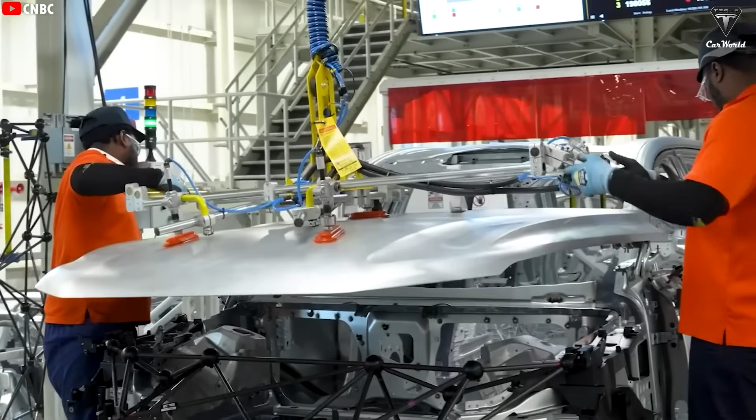But why are EVs so expensive? Why do so many people still push back against them? Well, the answer's pretty obvious. The battery. Batteries can make up nearly 40% of the total cost of an EV. And right now, most of those batteries are lithium-based. In fact, about 75% of the EVs on the road today run on lithium batteries.

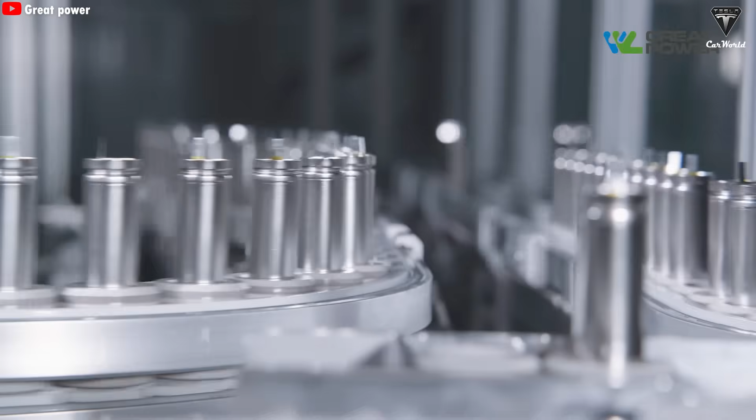Here's the undeniable truth. For years, the world has been living under the reign of lithium-ion. It's everywhere, not just in EVs, but in your iPhone, your AC remote, your kids' toys. You name it, it's lithium-powered. But believe it or not, that's about to change. In the not-so-distant future, lithium might be completely replaced, at least in EVs.

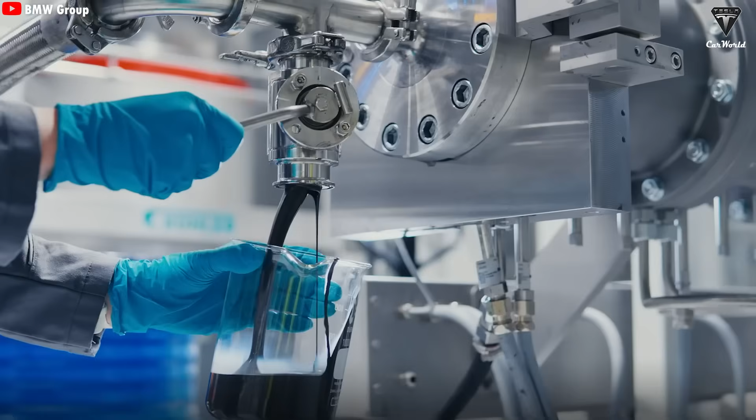Why? Because there are tons of new battery technologies being developed around the globe, all with one mission: to kick lithium off the throne. And if you hate Tesla, you might want to brace yourself, because this next part is only going to make you hate them more. Once again, Tesla is about to drop a battery that could change the game. We're talking about something with up to 3 times the energy density of what they're using now.

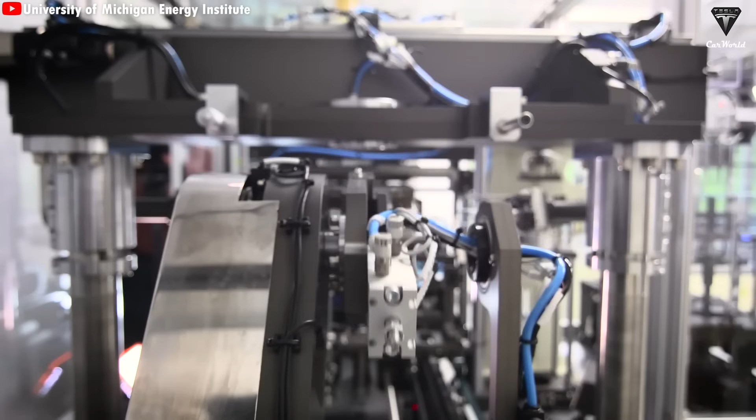Almost nobody knows what just happened at Tesla, but this new battery could completely rewrite the company's future, and it might just be Elon Musk's biggest gamble yet. How powerful is it? How cheap could it get? Let's find out. These new batteries have clearly been in the works at Tesla for a long time.

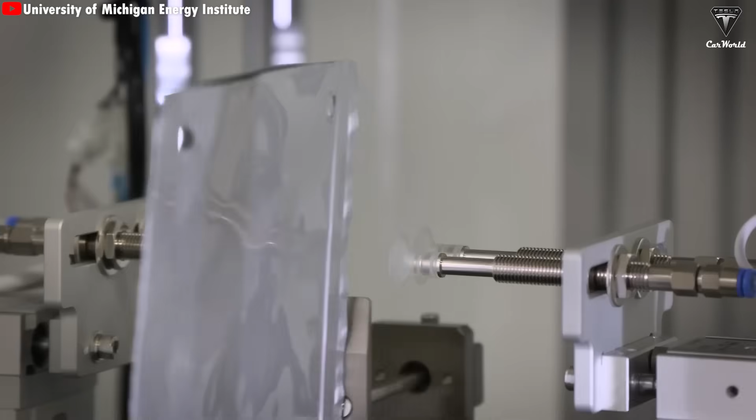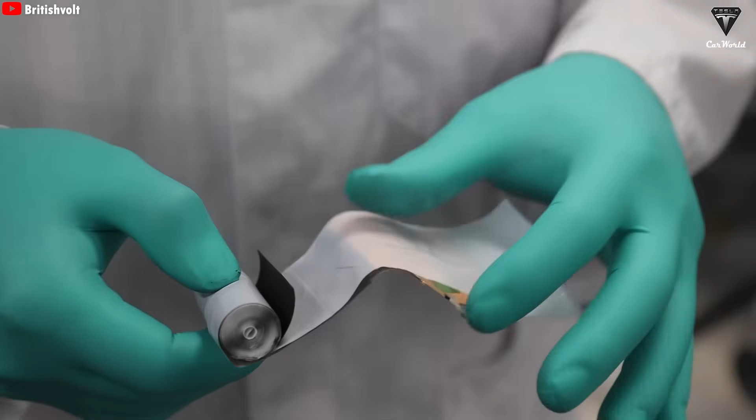Even though the company has tried to keep it under wraps, internal leaks have made it obvious that Tesla wants people to know they're doing something big to push EV battery technology forward, especially for the affordable model set to launch in the near future. What's mind-blowing is that this new battery is made from materials that are far more common and much cheaper than lithium, yet it delivers 3 times the energy density of current lithium-ion batteries.

Of course, no technology is perfect from day one. There are still a few hurdles to overcome. But overall, this battery is already superior in nearly every way. And once those final challenges are solved, this won't just compete with lithium. It could replace it entirely, ending lithium's reign once and for all. Yeah, this is the Tesla A1 battery, the company's first-generation aluminum-ion battery.

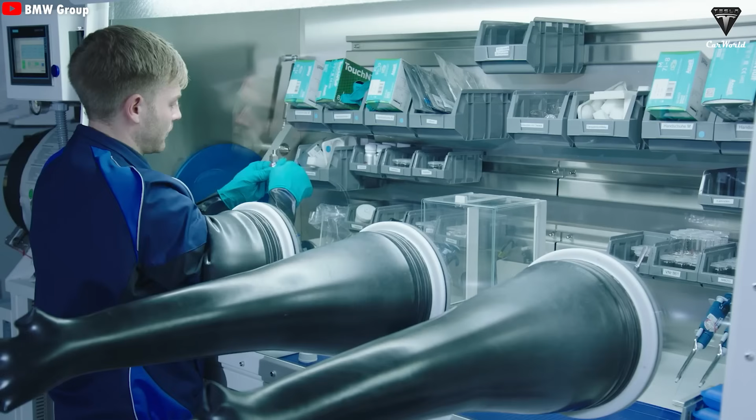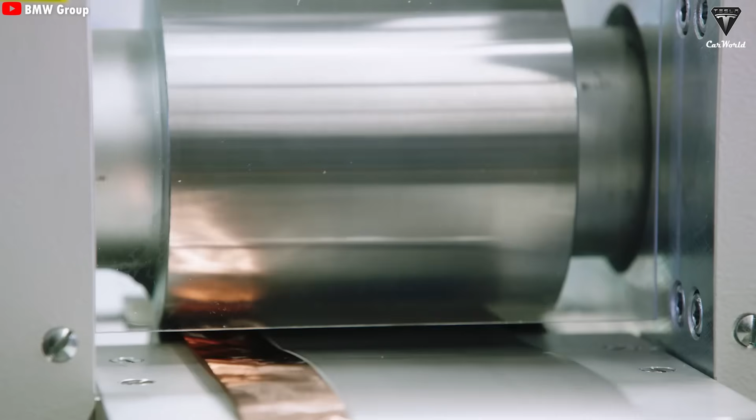Put simply, aluminum-ion batteries work much like lithium-ion batteries, but instead of using lithium ions as the charge carriers, they use aluminum ions. Each aluminum-ion cell has 3 main components: an anode, typically made from aluminum metal, where the aluminum ions originate; a cathode, built from materials such as graphene or metal oxides to store those ions; and an electrolyte, a liquid solution that allows aluminum ions to flow back and forth between the 2 electrodes.

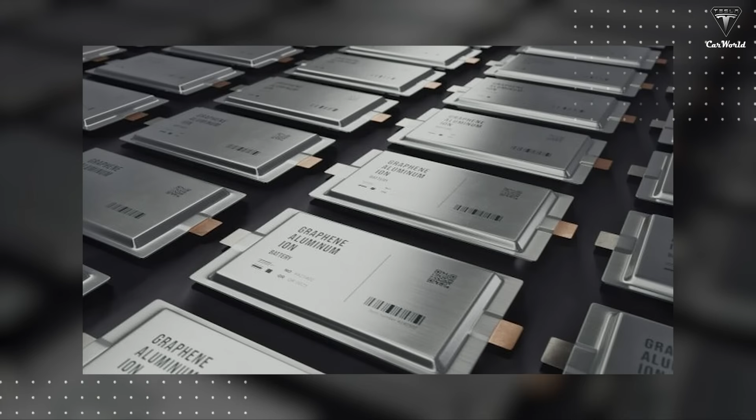The key difference lies in the very nature of aluminum. Each aluminum ion carries 3 positive charges, while a lithium ion carries only 1. This means aluminum can move 3 times more energy per ion, boosting energy density without relying on rare materials or complicated manufacturing processes. In theory, this allows aluminum-ion batteries to store far more energy in the same amount of mass compared to traditional lithium-ion batteries.

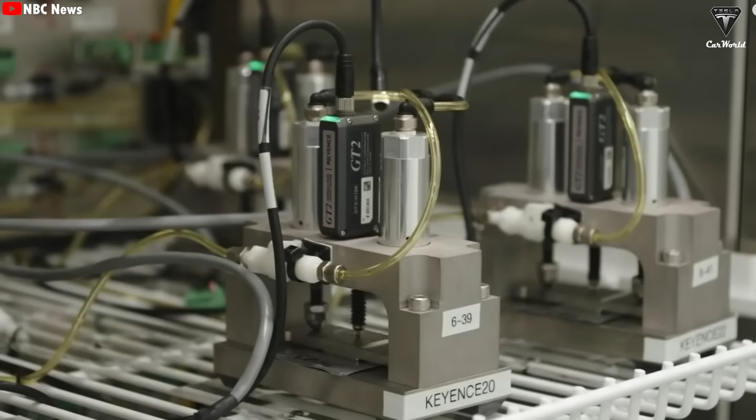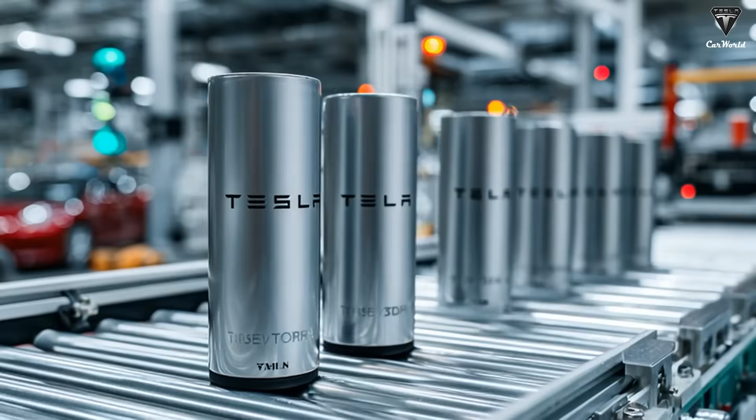And now, the real-world results are starting to prove that potential. Reports suggest that the aluminum-ion battery technology Tesla is testing has already reached energy densities of over 700 watt-hours per kilogram, a figure powerful enough to completely disrupt the battery industry. To put that into perspective, if you equipped a Tesla with this battery, it could travel over 700 miles. That's about 1,126 kilometers on a single charge.

Some estimates even push that number closer to 1,000 miles, around 1,600 kilometers per charge. That's a leap so massive that even the most optimistic EV enthusiasts would have a hard time believing it.

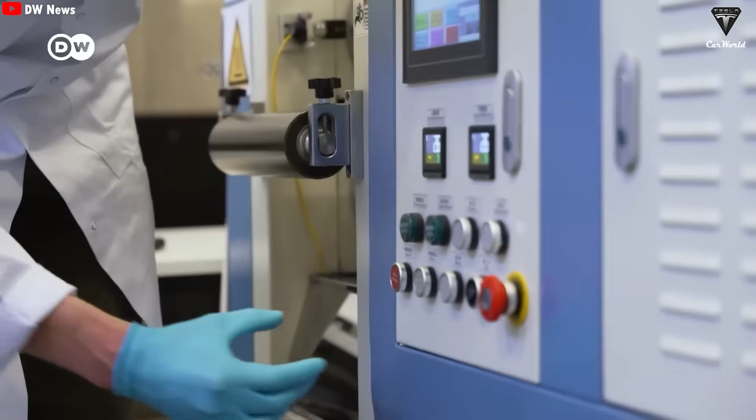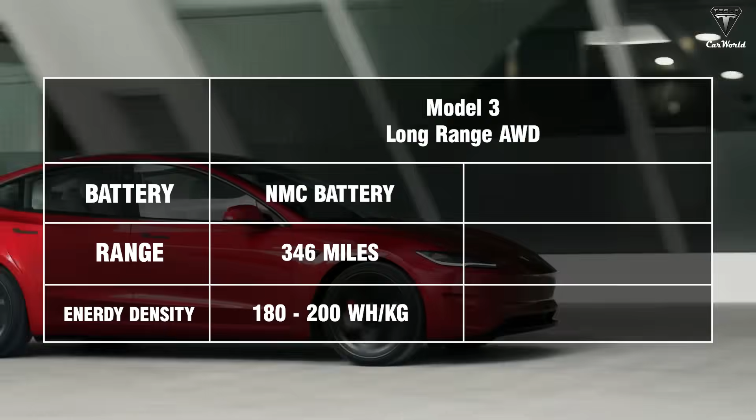Which raises one big question. How did Tesla pull off such a giant technological leap? A clear example really shows the difference. Right now, the Tesla Model 3 long-range AWD can go about 346 miles on a 79 kilowatt-hour NMC battery. And those NMC cells only have an energy density of around 180 to 200 watt-hours per kilogram.

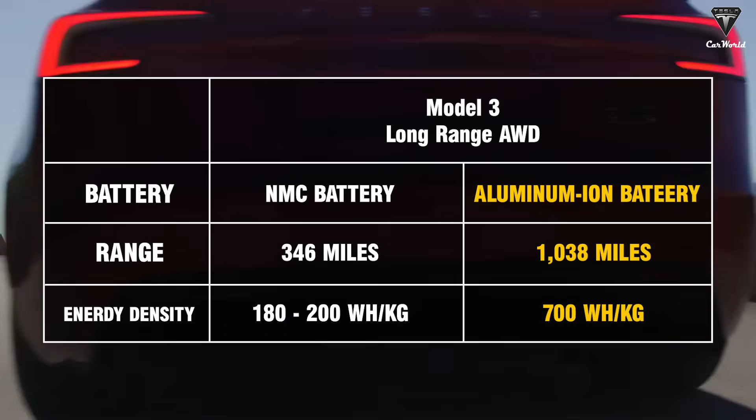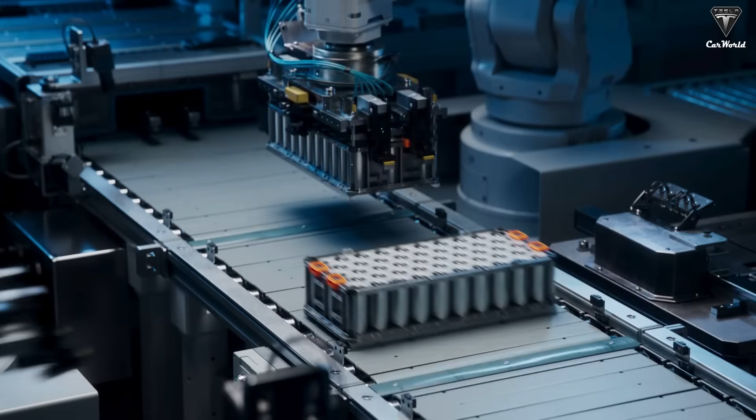But aluminum-ion batteries, they hit about 700 watt-hours per kilogram. That's roughly 3.5 times higher. What does that mean? If you swapped out the Model 3's NMC pack for an aluminum-ion pack of the same size, that car could easily hit around 1,038 miles, over 1,600 kilometers on a single charge. That's not just pushing past today's limits. It's rewriting the standard for the entire EV industry.

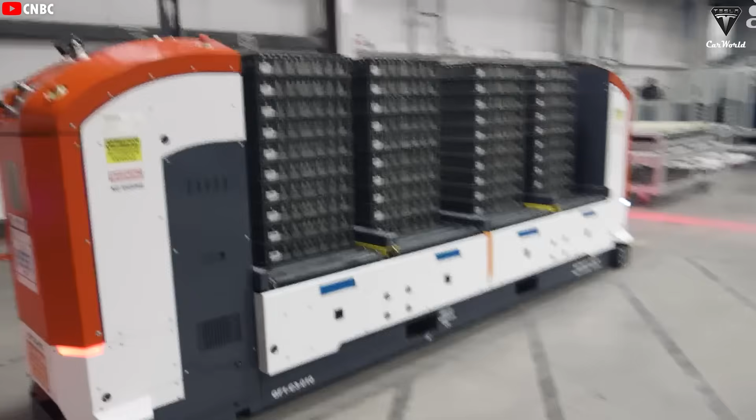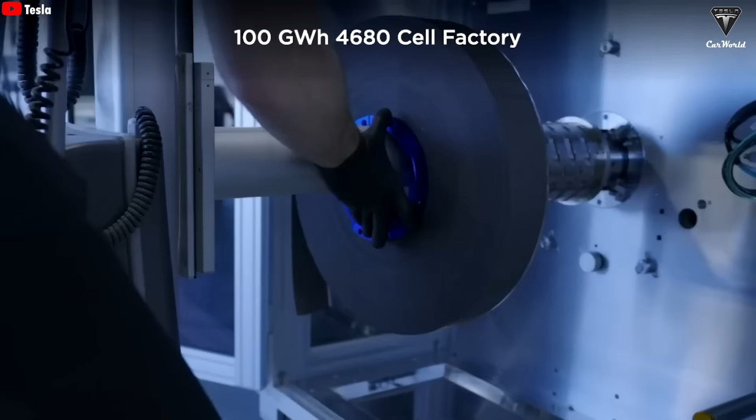And while lithium-ion batteries are still widely used today, as we mentioned earlier, they haven't seen any truly groundbreaking leap in energy density for decades. Lithium-ion has been stuck at roughly 200 watt-hours per kilogram for years. Even with Tesla's most ambitious efforts, their 4680 cells, energy density has only climbed to about 275 watt-hours per kilogram, which simply isn't enough to change the game. And that's exactly why there's room for something new, and aluminum-ion is stepping in as one of the most promising answers we've ever seen.

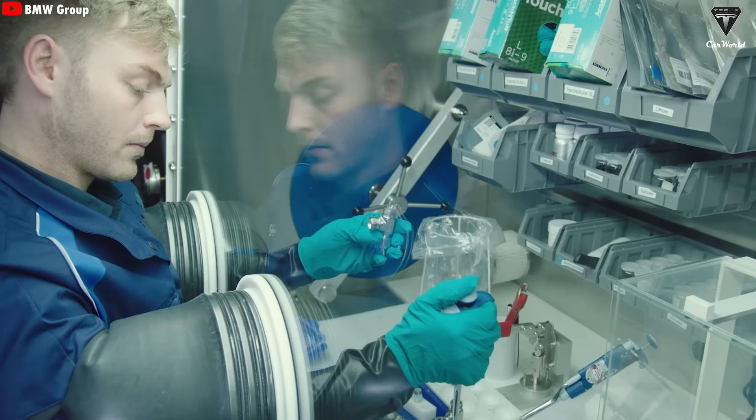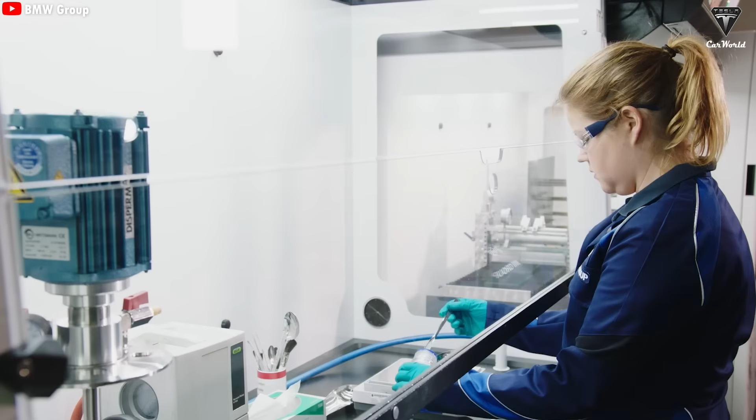That said, we've got to be realistic here. Sure, aluminum-ion batteries can hit 700 watt-hours per kilogram at the cell level, but once you build a full battery pack with the casing, cooling system, and all the extra hardware, that number comes down. And that's exactly why optimizing the pack's size is so critical. It's the key to keeping performance high while also cutting down production costs. So instead of that theoretical 1,000-mile range, a more practical number would be closer to 700 miles. But honestly, that's still enough to blow past anything on the market today.

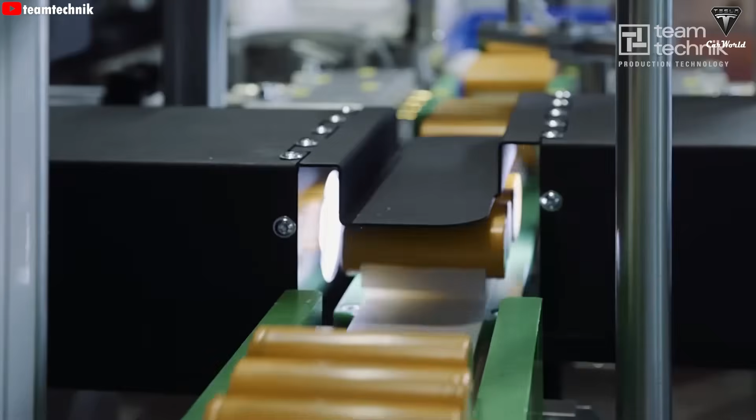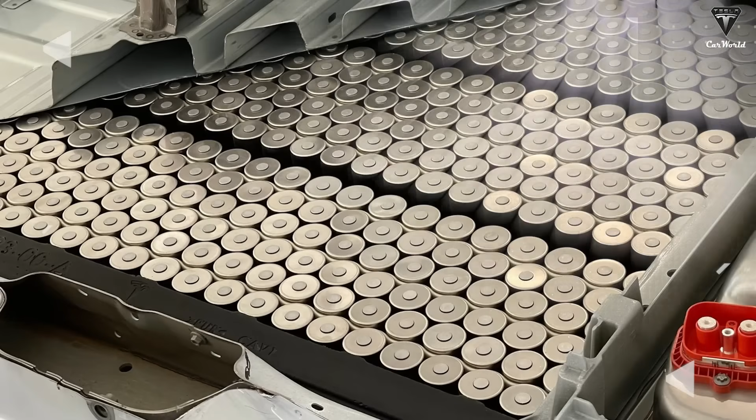Now, if we look at Tesla's 4680 battery, it's still one of the most advanced battery technologies in the world. But here's the catch. This incredible battery is only showing up in high-end cars. Right now, it's basically limited to the Cybertruck, and even the cheapest variant starts at $69,990. And that raises a big question. Can Tesla actually bring this tech down to more affordable cars like the Model 3 or Model Y anytime soon? The answer, at least for now, seems to be a hard no.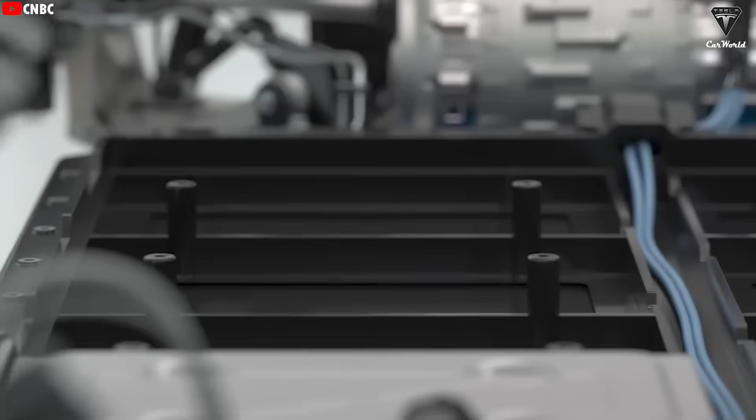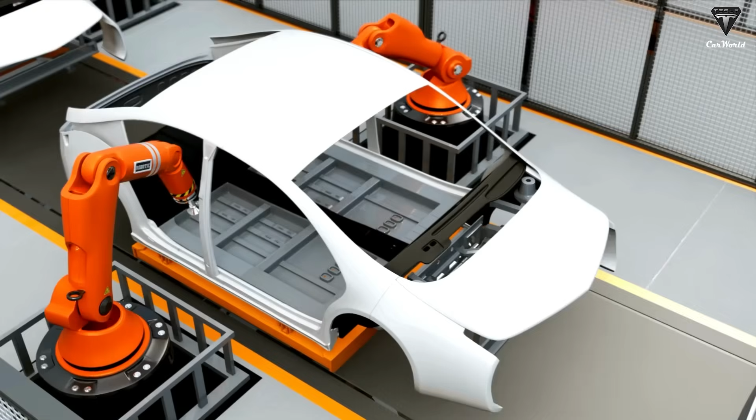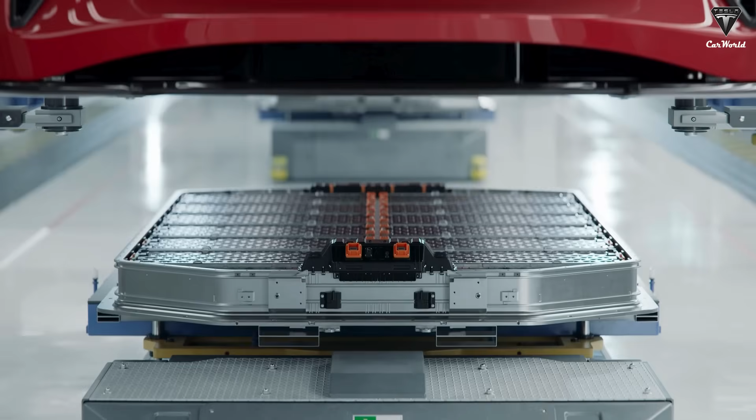The reason's pretty straightforward. Lithium prices keep skyrocketing, which is driving up battery production costs like crazy. Since pretty much all of Tesla's current batteries, LFP, NMC, you name it, including the 4680, still rely heavily on lithium, using the 4680 for cheaper cars is basically a pipe dream. Elon Musk has talked up a storm about launching a compact electric car for around $25,000. But let's be real. That plan's been stuck in neutral for over 4 years. Word is it's finally dropping this November, and no shocker here. Tesla's almost definitely going with LFP batteries for that one.

While an energy density of 700 watt-hours per kilogram is certainly impressive, that's not the only reason Tesla is so committed to aluminum-ion battery technology. As Elon Musk has pointed out, the bigger problem is the ever-escalating cost of lithium-ion batteries. This is largely due to the soaring demand for lithium and limited supply, which has led to overmining and ever-increasing prices. This has not only put pressure on the entire EV industry, but has also made it difficult for manufacturers like Tesla to create more affordable models for consumers.

So the price of lithium and all the raw materials and the battery cells went crazy. It doubled. The price of cells doubled. Price of lithium, I think, went up at almost fivefold or 500%. Went up crazy numbers.

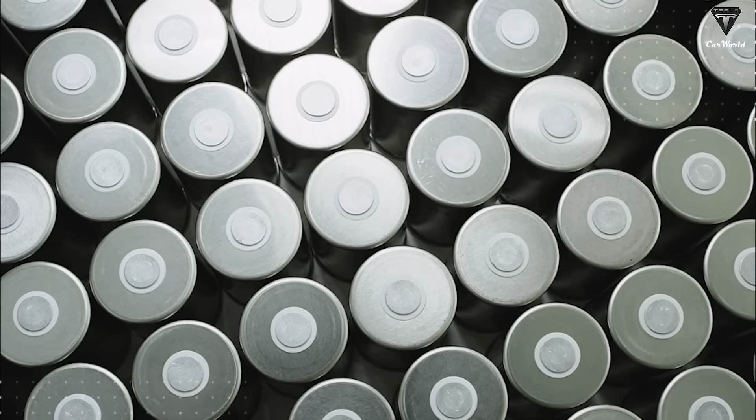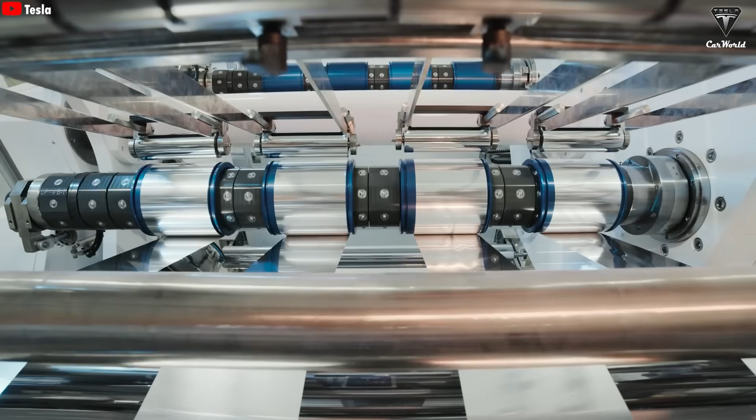Right now, Tesla's using LFP and NMC batteries for the Model 3 and Model Y, while the Cybertruck's rocking the 4680 cells. All three rely on lithium, and they also use pricey materials like nickel and cobalt. A quick Google search will tell you these are some of the most expensive materials for battery production. Even Elon Musk has admitted that the 4680 batteries are actually pricier than traditional ones, since they're packed with all three: nickel, cobalt, and lithium.

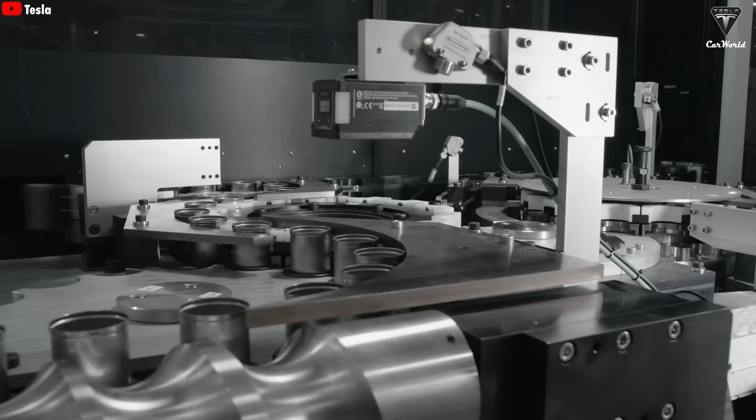So, even though the 4680 is cutting-edge tech, the cost is still a major hurdle keeping Tesla from slapping it into more affordable models.

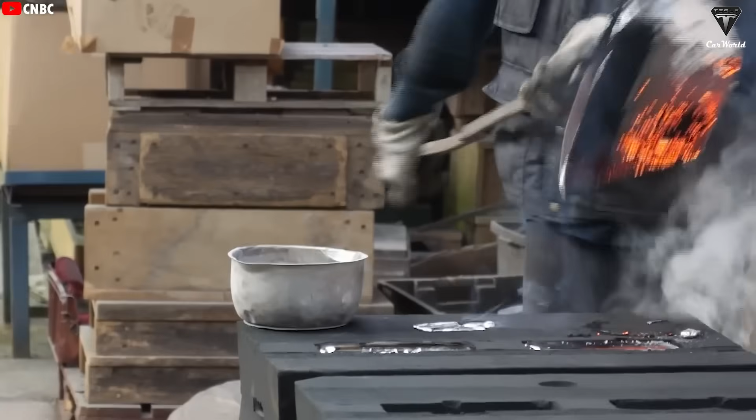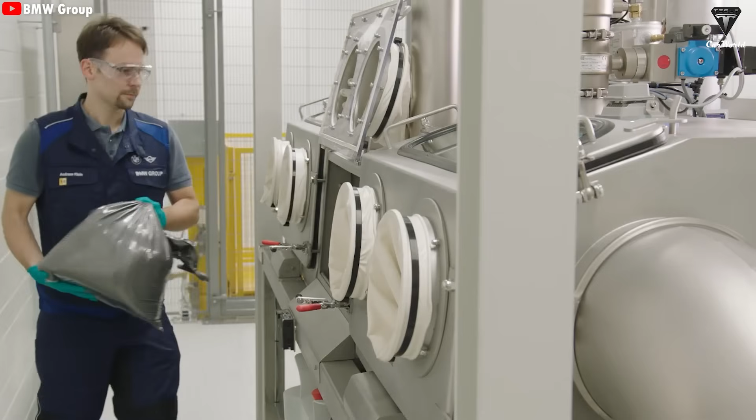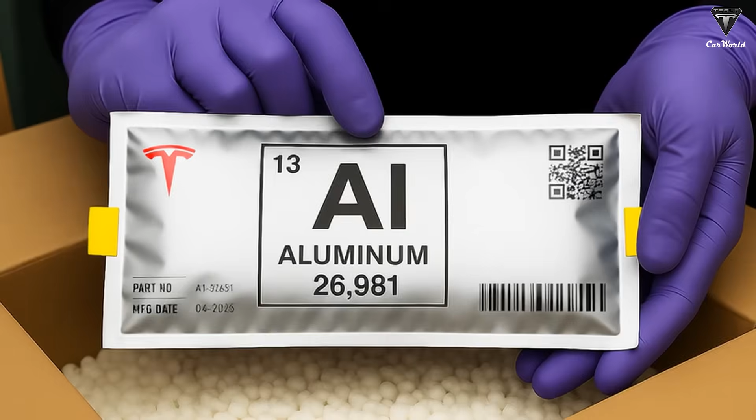According to the data we've seen, aluminum-ion batteries could cost as little as $40 to $65 per kilowatt-hour once the tech hits full commercial scale. And that number could drop even further if Tesla ramps up large-scale production, something they've already proven they can do with their massive battery lines at the Nevada Gigafactory. Of course, Tesla doesn't regularly disclose details about production costs, and so far they've never officially revealed the actual cost of the batteries they use.

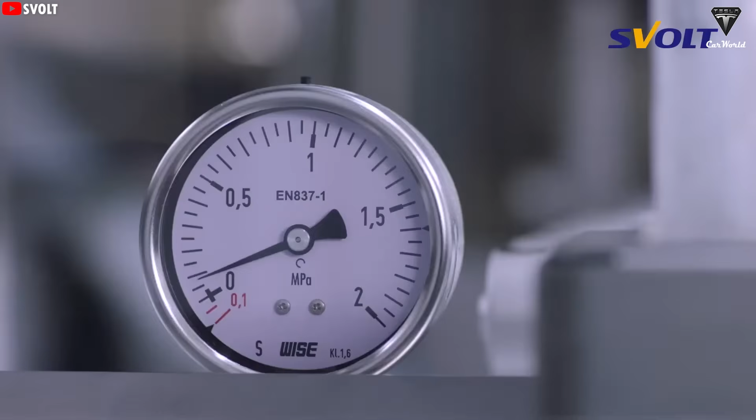However, based on independent analyses, it's estimated that batteries typically account for about 25 to 40% of a Tesla's total production cost, depending on the battery type, vehicle model, and specific configuration. For example, with the Tesla Model Y priced between $45,000 and $60,000, its battery pack ranges from 67 to 82 kWh. Applying an average NMC battery cost of around $139 per kilowatt-hour, the battery pack's cost would be approximately $9,300 to $11,400, equivalent to 19 to 25% of the vehicle's total value.

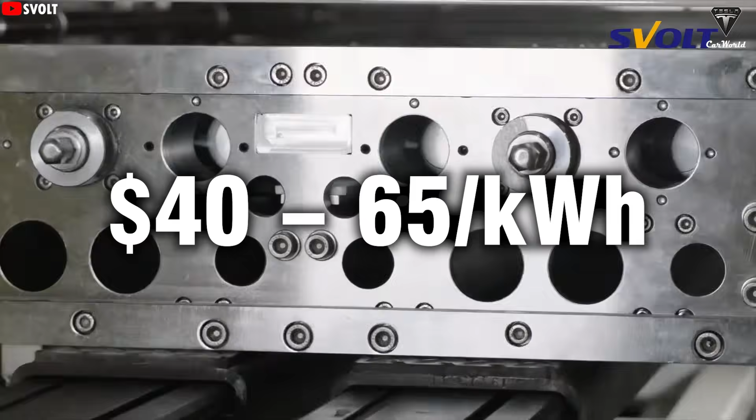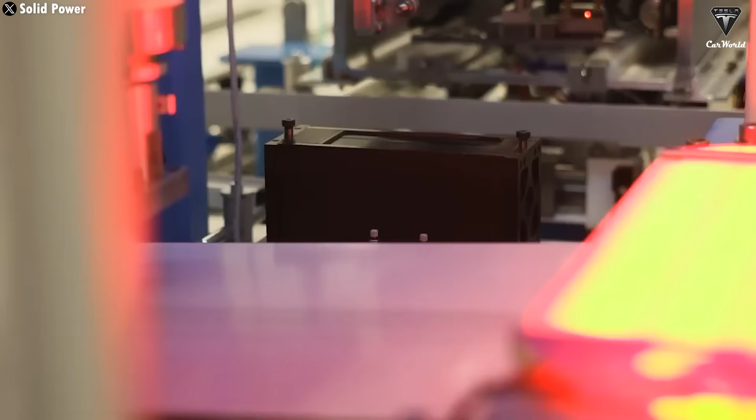However, if replaced with aluminum-ion batteries costing only $40 to $65 per kilowatt-hour, this figure would drop significantly to just $2,700 to $5,300. This means Tesla could substantially reduce selling prices, creating a real opportunity to bring affordable EVs to more people.

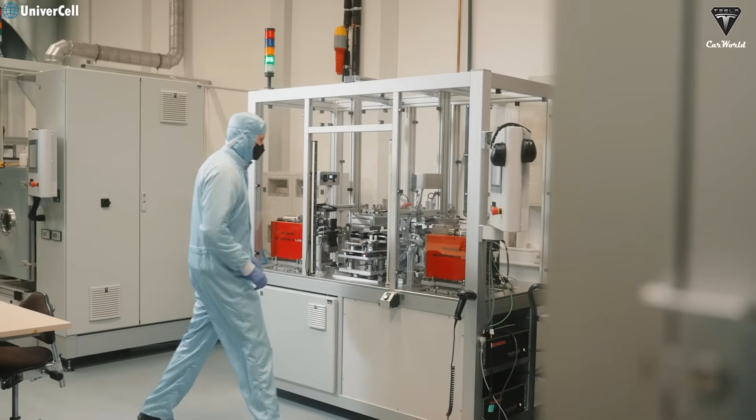When Elon Musk chooses to invest in a new battery technology, performance and energy density are always top priorities. However, the most critical factor is scalability. No matter how powerful a battery is, if it's too expensive and only suitable for luxury vehicles, it won't drive real change. That's why aluminum-ion batteries are expected not only to deliver superior performance, but also to solve the production cost challenge, a key factor in enabling Tesla to lower electric vehicle prices and shed its reputation as a company that only sells EVs for the wealthy.

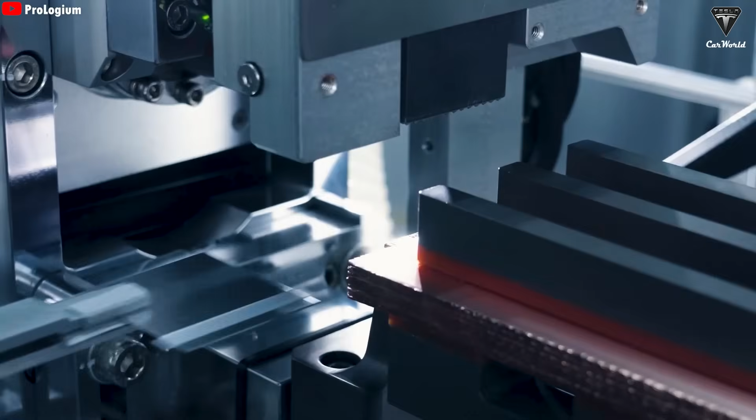Beyond that, aluminum-ion batteries have an advantage that even the most advanced lithium-ion batteries can't match: charging speed. While a modern lithium-ion battery takes at least 20 to 30 minutes to charge to 80%, aluminum-ion batteries can reach a full charge in just 5 minutes, and notably they do so without overheating. This could eliminate one of the biggest barriers preventing wider adoption of electric vehicles.

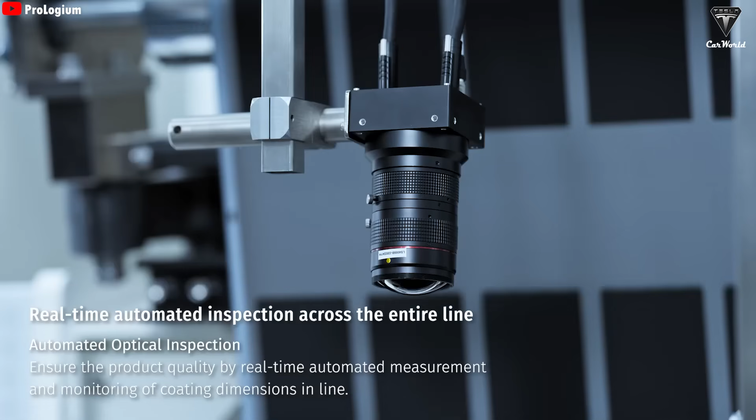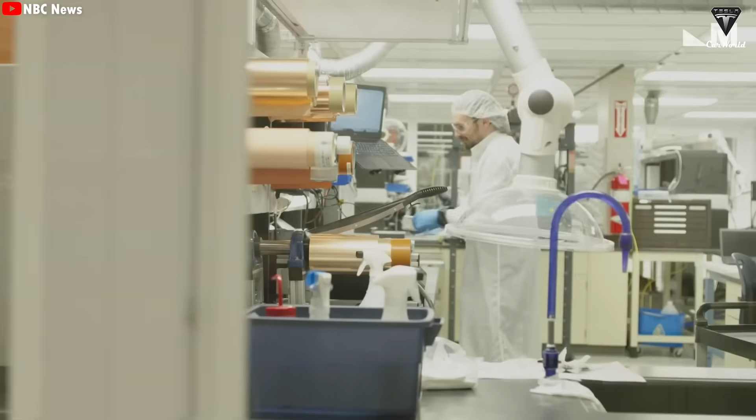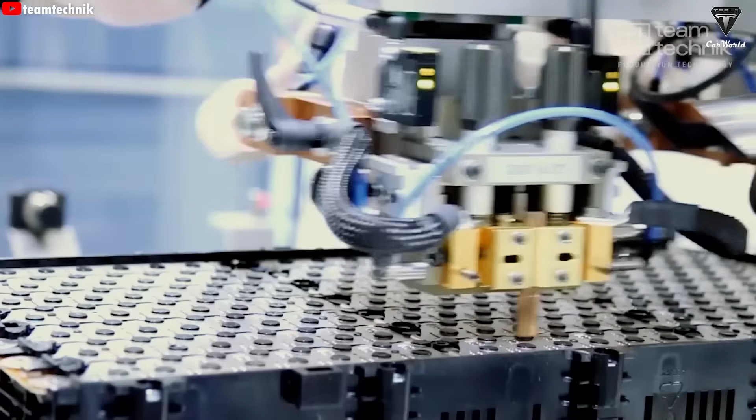The ultra-fast charging capability of aluminum-ion batteries stems from their fundamental properties. Aluminum ions move through the electrolyte 3 times faster than lithium ions. As a result, charging is not only faster but also maintains optimal performance without stressing the battery's structure. More importantly, these batteries offer superior thermal management, effectively addressing the overheating issue, a critical weakness of traditional lithium-ion batteries. Thanks to these advantages, aluminum-ion batteries are not only faster to charge but also safer and more durable over the long term.

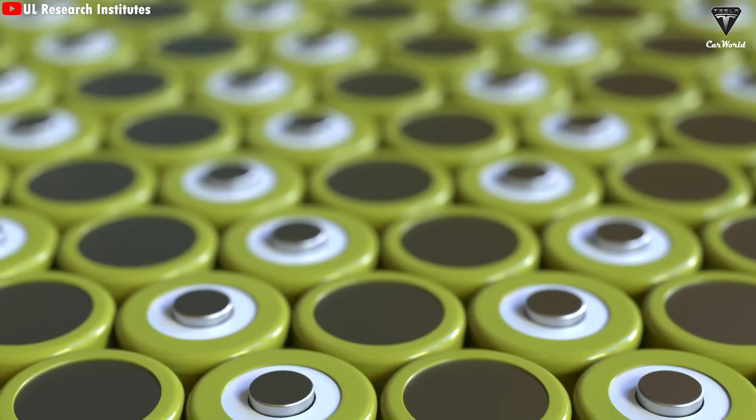Additionally, one of the chronic diseases of lithium-ion batteries, the formation of metal dendrite crystals, is virtually non-existent in aluminum-ion batteries. Dendrites are metal crystals that form during charging, potentially piercing the separator, damaging the battery's structure, and causing serious issues like reduced performance or even fires and explosions. With aluminum-ion batteries, the release of aluminum ions occurs much more uniformly and stably, nearly eliminating the risk of dendrite formation.

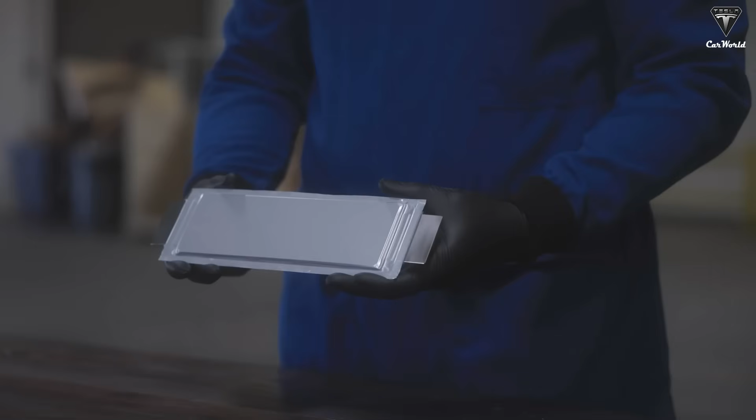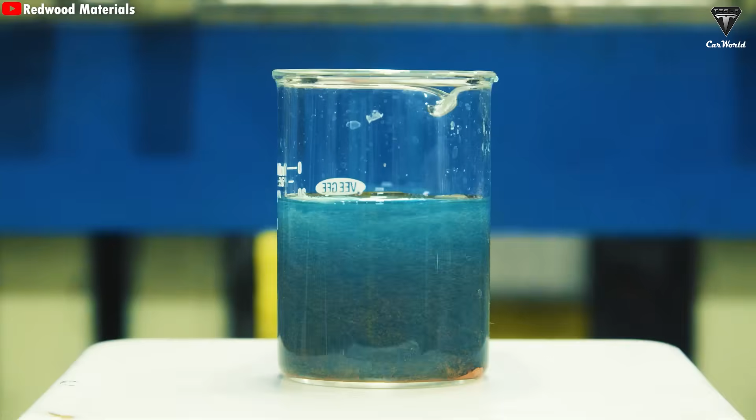Studies from reputable institutions like Stanford University have shown that these batteries can withstand tens of thousands of charge-discharge cycles without this issue, a massive leap forward compared to traditional lithium-ion batteries. While conventional lithium-ion batteries typically endure around 2,000 charge cycles before dropping to 80% capacity, equivalent to 4 to 8 years of daily use, some independent studies suggest aluminum-ion batteries can achieve up to 15,000 cycles.

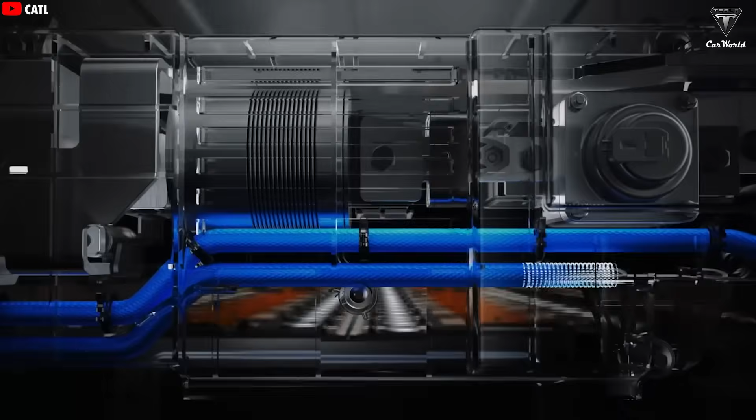This means that with proper use and maintenance, an aluminum-ion battery could last up to 35 years, a true game-changer compared to current battery technologies. The reason for this remarkable durability lies in the physical and chemical properties of aluminum.

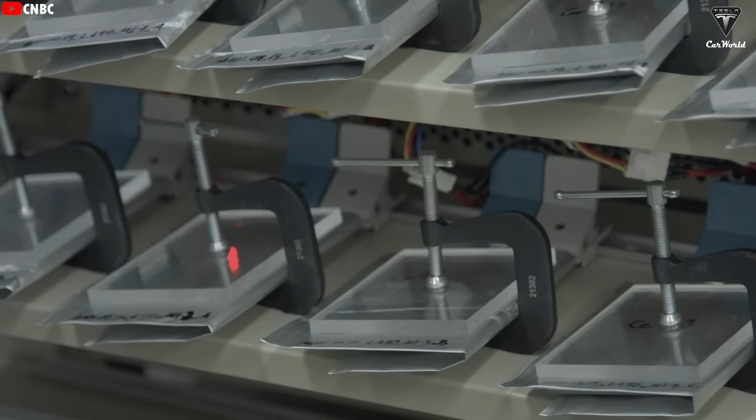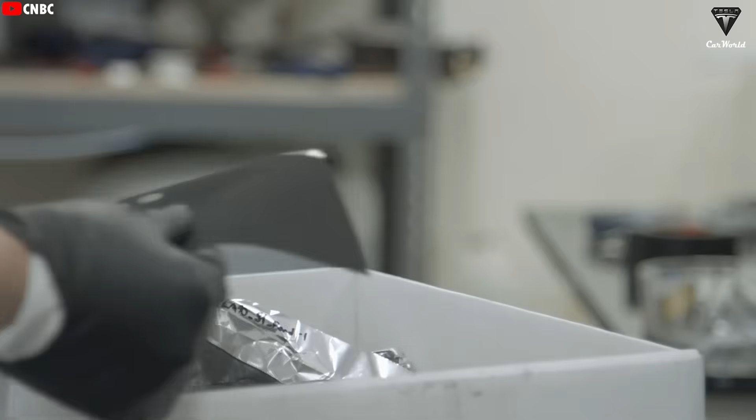Physically, aluminum is an exceptionally robust material, widely trusted in modern car frames for its strength and resistance to deformation. Chemically, aluminum is far more stable than lithium. While lithium readily reacts with oxygen and water, leading to material degradation over time, aluminum forms a natural oxide layer when exposed to the environment. This oxide layer acts as a shield, preventing corrosion and maintaining the stability of the anode, thereby extending the battery's lifespan far beyond existing technologies.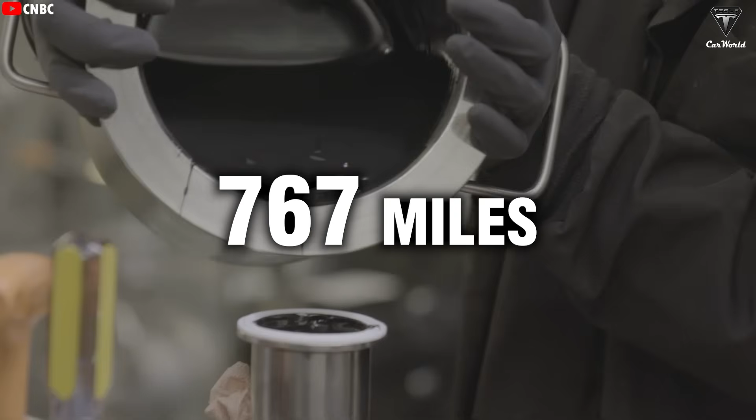This is the key point. Tesla isn't just developing a battery that charges faster. It's creating one durable enough to potentially outlast the electric vehicle itself, making battery replacement a thing of the past.

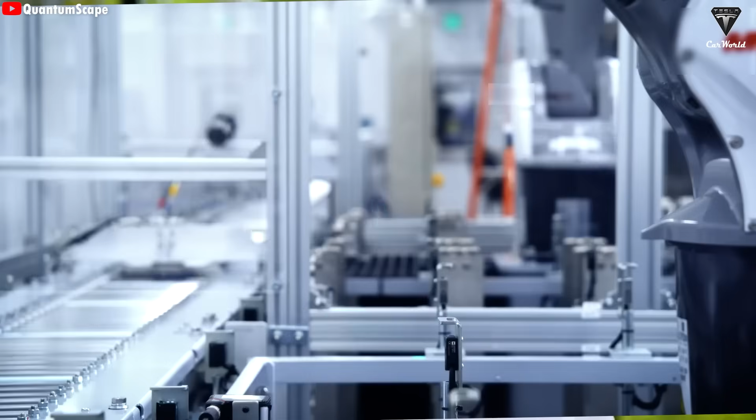But that's not all. Another persistent issue with lithium-ion batteries is the risk of fire and explosion. Lithium batteries can ignite if impacted or overcharged, and the resulting smoke is not only toxic, but also extremely difficult to extinguish. Despite years of research and improvements, this risk has not been entirely eliminated. In contrast, aluminum-ion batteries are nearly immune to this danger due to their stable chemical properties and superior heat resistance, setting a new safety standard for the EV industry.

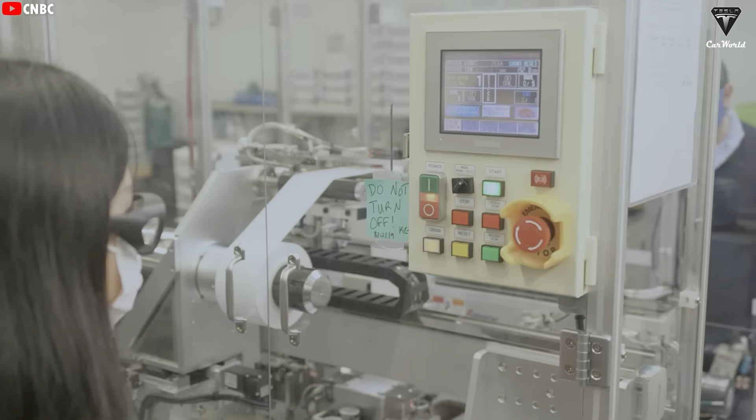Additionally, aluminum-ion batteries offer a strategic advantage: superior recyclability. Aluminum is the most abundant metal on Earth, and if this technology is widely adopted, it could significantly reduce reliance on expensive and hard-to-mine metals like lithium, nickel, or cobalt. Laboratory experiments have already shown that up to 80% of aluminum fluoride salts can be recovered, with expectations of even higher rates at industrial scale.

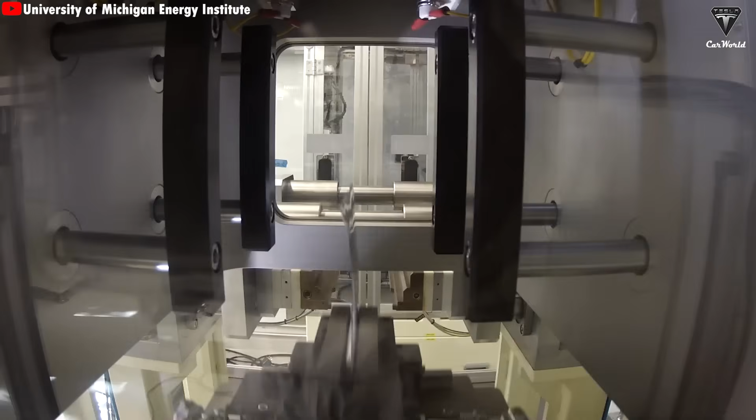Notably, the solid aluminum foil from these batteries can be reused almost directly after cleaning, making aluminum-ion batteries one of the most sustainable and environmentally friendly solutions the industry has ever seen.

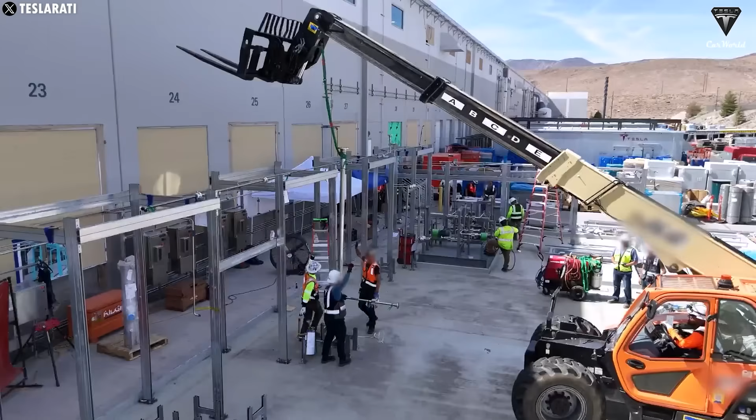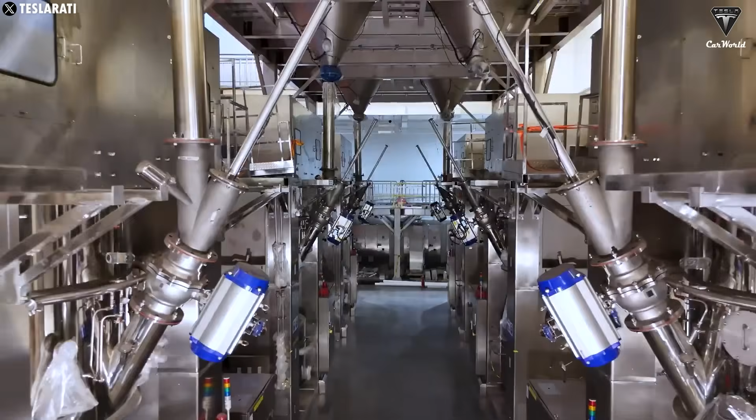However, no technology is perfect from the start, and aluminum-ion batteries are no exception. A notable challenge is their reduced performance in low-temperature environments, which currently limits their use in colder climates. Nevertheless, this is not an insurmountable barrier. Leading research teams worldwide, including Tesla, are intensely focused on addressing this issue to ensure that aluminum-ion batteries not only excel in performance, but are also ready for all real-world conditions.

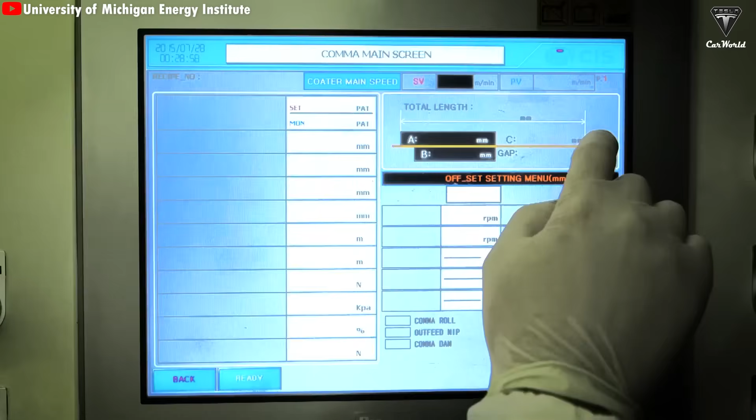Currently, aluminum-ion batteries have not been widely publicized and are rarely mentioned in mainstream media. However, if Tesla can successfully commercialize Al-ion battery cells and integrate them into more affordable vehicle models, it would not only be a technological breakthrough, but also a game-changer for the entire electric vehicle industry.

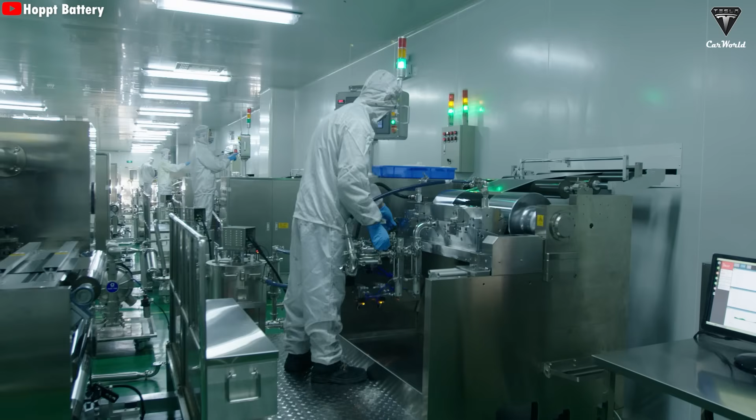According to internal sources, Tesla plans to produce all aluminum-ion batteries in the U.S. at a new expanded facility adjacent to Giga Nevada. The production line is expected to begin operations by the end of this year, once all equipment is installed and fully calibrated. In theory, the lifespan of aluminum-ion batteries is truly impressive.

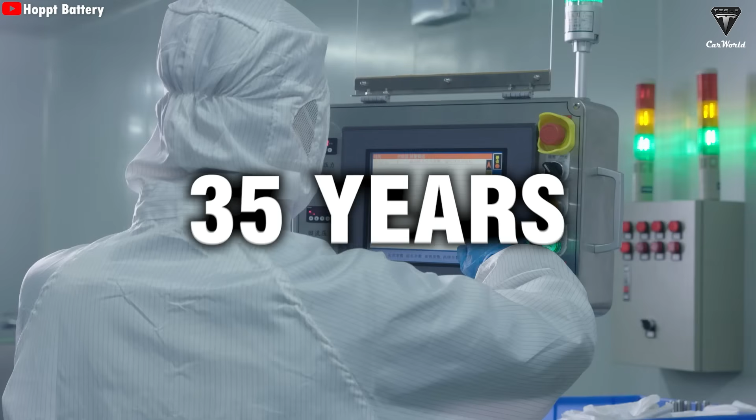No battery lasts forever, but with the potential to achieve up to 15,000 charge cycles, aluminum-ion batteries could last 35 years or more, a figure that lithium-ion batteries cannot come close to matching. This makes them an ideal choice not only for electric vehicles but also for large-scale energy storage systems.

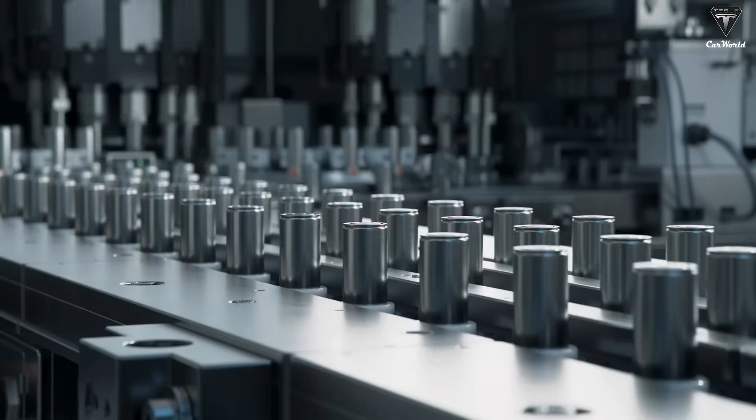More importantly, in terms of cost, researchers believe that when mass-produced, the price of aluminum-ion batteries could be comparable to, or even lower than, current lithium iron phosphate batteries, a possibility that was once considered nearly impossible.

Over the past 2 years, lithium prices have been a roller coaster, with brief dips followed by sharp spikes. This year, they surged to $9,200 per ton. The issue isn't just the cost, but also the scarcity.

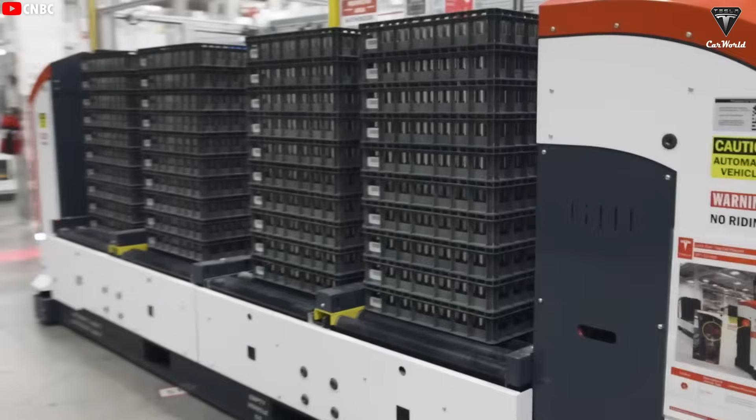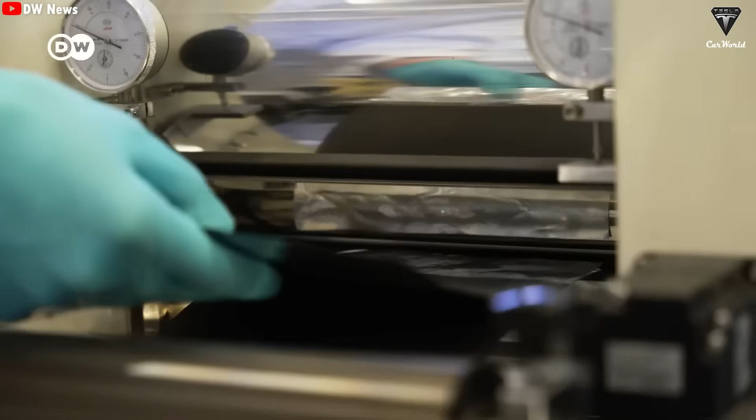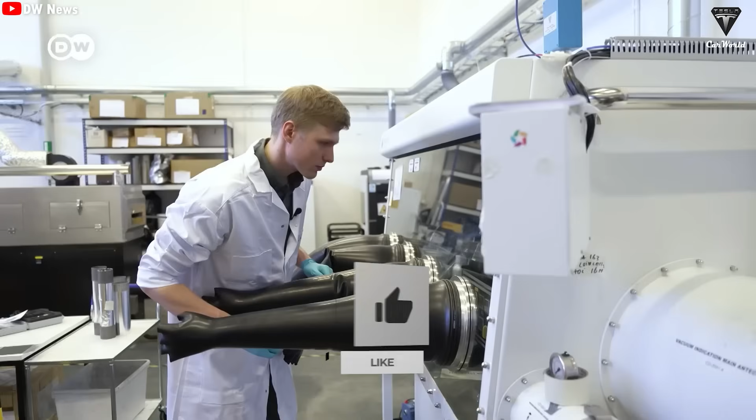Global lithium reserves are estimated at around 89 million tons, nearly 18 times less than aluminum. More concerning, the majority of these reserves are concentrated in just 4 countries. China holds about 16.5%, with the rest primarily in the lithium triangle of Chile, Bolivia, and Argentina. With such concentrated supply, lithium prices are not only high, but also vulnerable to geopolitical factors.